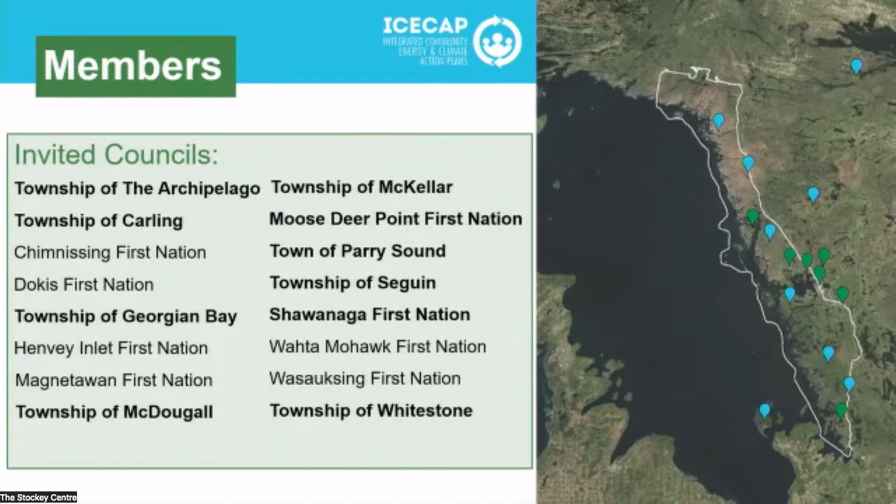As part of its commitment to ICECAP and its objectives, the town is currently working through the Partners for Climate Protection program, overseen by the Federation of Canadian Municipalities and the International Council for Local Environmental Initiatives. Across Canada, over 400 municipalities have joined and are working on this program, so there's plenty of resources and case studies to help guide participants, further improving the cost effectiveness of taking on this work.

The Partners for Climate Protection program operates on a 5-milestone framework. This starts by conducting a baseline inventory of emissions and projecting them into the future. From there, an emissions reduction target is set, and an action plan is developed to serve as a roadmap for how that target is going to be reached. That plan is then implemented, and its progress is monitored along the way.

With respect to milestone 2 and establishing that emissions reduction target, it's worth noting that the town, as well as other ICECAP members, are carrying out this work with what's called a bottom-up approach. This means undertaking an in-depth review of the opportunities, technologies, constraints, and asset replacement schedules to better understand what level of emissions reductions is actually feasible to achieve.

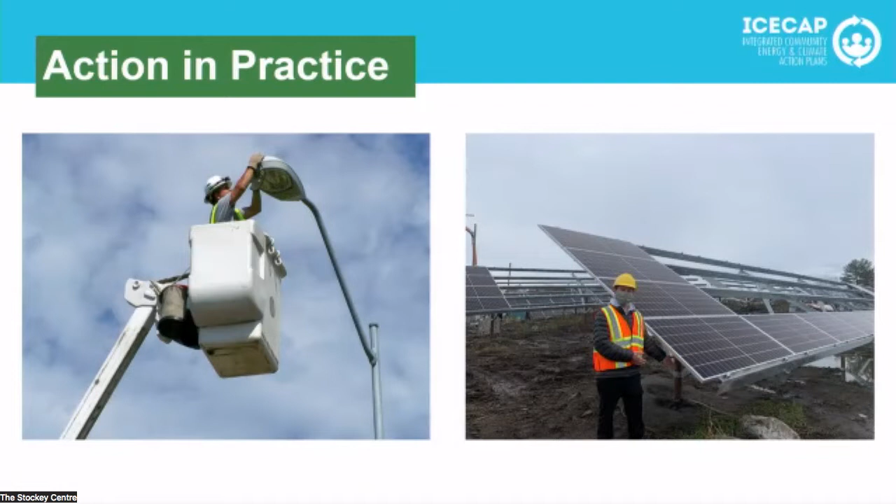The 3D milling project, which we've been gathered here to discuss today, is another such project that aligns with the town's climate action commitments and also supports ICECAP's objectives within the region.

As a climate action practitioner, what I find truly interesting about this project is that it's an excellent example of the town's ability and leadership to reduce their Scope 3 emissions. This is an exceptional undertaking because Scope 3 emissions, for the town as well as other local governments, are notoriously difficult for any organization to address.

Despite this difficulty, by being accountable and moving forward with its climate action commitments, the town's efforts to source and look for these innovative opportunities and solutions result in projects that are expected to see cost savings and emission savings compared to a more traditional program. This is a perfect example of what ICECAP seeks to achieve, and of the alignment between commitment, planning, and action in the climate change world—looking for ways to address climate change while developing our communities in a more sustainable way at the same time.

Importantly, I also want to recognize that the town's efforts here have regional benefits as well. Through the knowledge sharing platform and discussion that happens at the ICECAP table, other ICECAP members will have the opportunity to learn about this technology, its benefits, and the town's experiences with it. In turn, this will support those members in achieving the same sort of benefits when undertaking similar projects.

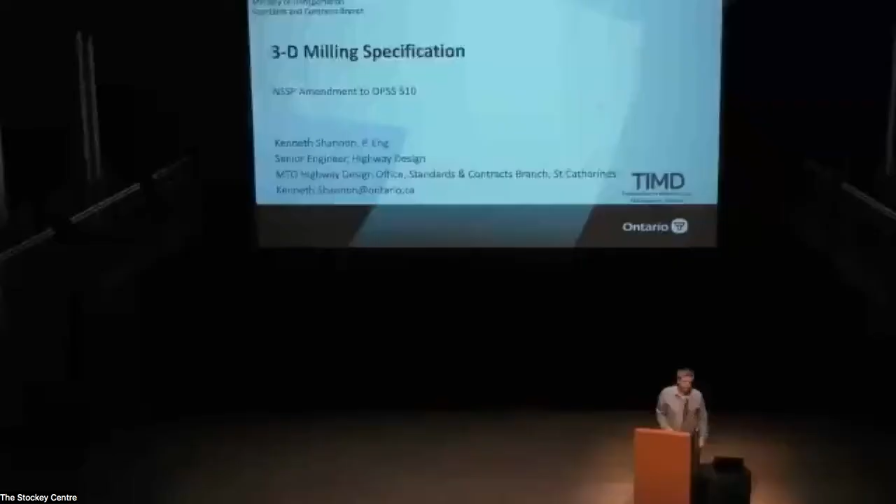Good afternoon, everyone. My name is Kenneth Shannon. I'm a senior engineer in the Highway Design Office at MTO in St. Catharines. I want to start off by thanking the Town of Parry Sound and Mike for the invitation to present here. I'll be giving a brief presentation on a non-standard special provision amendment to OPSS 510, our removal specification, which covers 3D milling. I personally wasn't directly involved in the development—my office just kind of got it to the finish line. My office deals primarily with geometric design, roadside safety, and active transportation, that kind of thing.

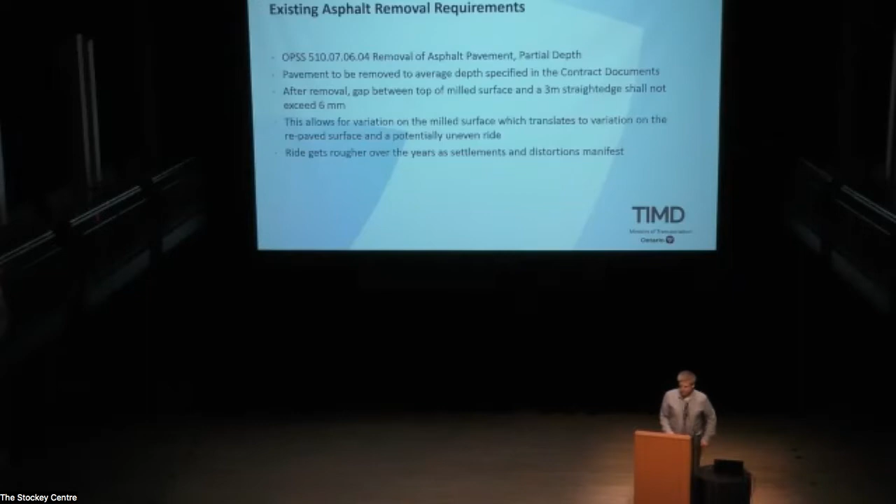Not to discount—obviously there's certainly a geometric component to 3D milling, but there's also geomatics as well as geotechnical, which were all heavily involved. So the existing asphalt removal requirements are covered in OPSS 510 for removal of asphalt pavement, partial depth. Currently, the pavement is removed to the average depth specified in the contract documents. The way of doing on-site quality control is to hold a 3-meter straight edge, and the maximum gap between the bottom of that straight edge and the milled surface shouldn't exceed 6 millimeters.

So what this means is any variation or distortion on the existing highway is likely going to translate into the milled surface, and thus onto the repaved surface. That'll lead to potentially uneven ride, and distortions get rougher over the years as they tend to intensify with vehicle loading. So again, it's served us well for many years—it generally works, but to mirror Mike's comments, there's always room for improvement. That was the goal we're chasing with this special provision.

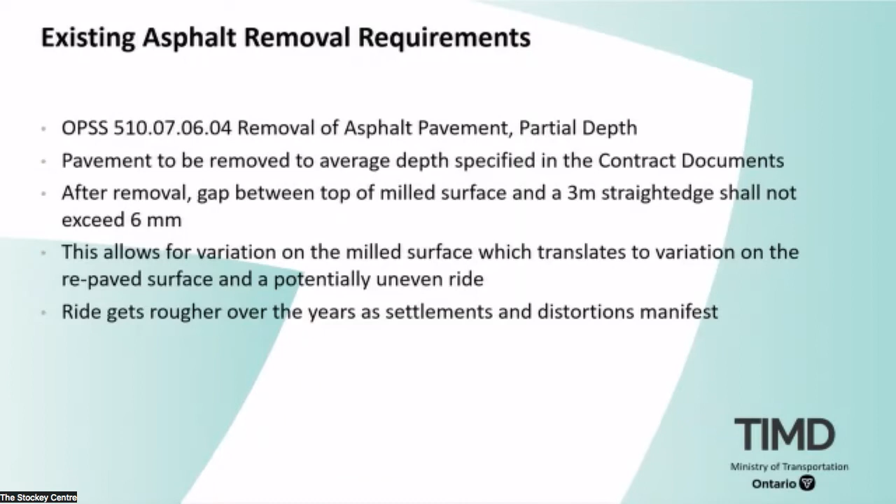So emerging technology—again, the ministry's been aware of this for a number of years. There's automatic machine guidance that allows for removal of pavement to a much higher degree of precision compared to the average depth method that we currently specify in our removal spec. As I'll take you through, the equipment can mill to a predetermined or pre-designed 3D surface, which is input into its computer. So we've developed this NSSP as an amendment to OPSS 510 that allows for this.

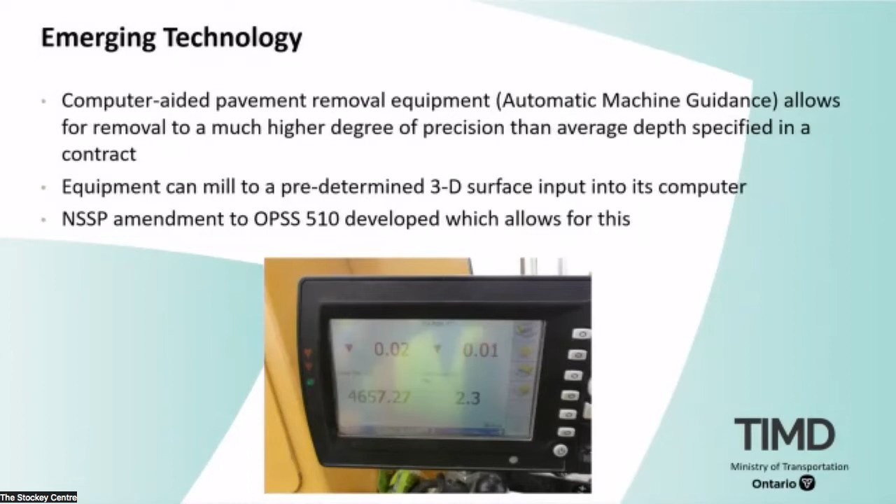So the benefits of 3D milling: it minimizes waste and inefficiency in milling and paving operations. There's obviously the greenhouse gas component, which wasn't the primary driver behind this, but it's certainly a part of it. Our office has a climate change engineer who looks at ways the ministry can reduce its carbon footprint. It reduces the chance of any existing distortions reflecting through into a rehab pavement surface, and ensures consistent, high quality in achieving specified cross slopes, super elevations, and transitions. It also provides an overall superior as-built product, which hopefully would require fewer repairs between rehab cycles—patching, strip repairs, selected localized repaving, and things like that our maintenance forces have to do.

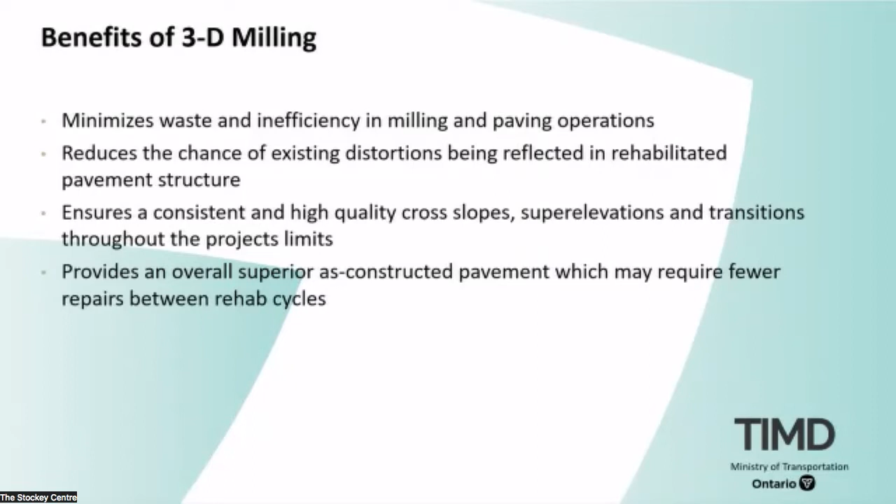From the feedback I've received in the field, there's 2 projects where it's been used as a trial this year, and the accuracy of the initial LiDAR survey is really the key to success. That's what they're finding in the field.

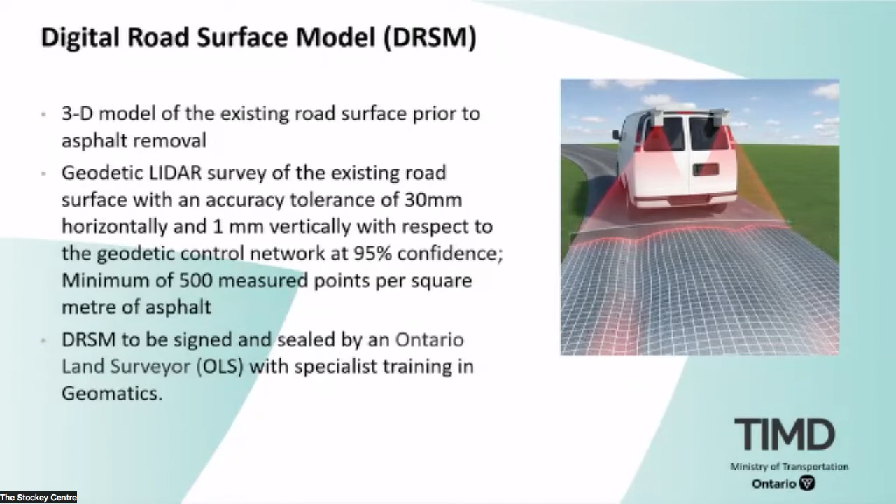They measure out a minimum of 500 measured points per square meter of asphalt. So over kilometers and kilometers of road, multiplied by however many lanes there are, that's quite a bit of data to be processed. The digital road surface model needs to be signed and sealed by an OLS with a specialist in geomatics.

So from the DRSM, we convert that into a digital design model. This is a 3D model of the proposed milled asphalt surface. And again, the DDM can be optimized.

Based on a number of constraints, I won't go through all of them, but a couple of things to highlight: it can allow for a smooth longitudinal transition where required - 400 to 1 for freeways, 200 to 1 for roads with lower design speeds and lower traffic volumes - as well as provide an opportunity to match into existing constraints, so curbs, catch basins, maintenance holes, that kind of thing.

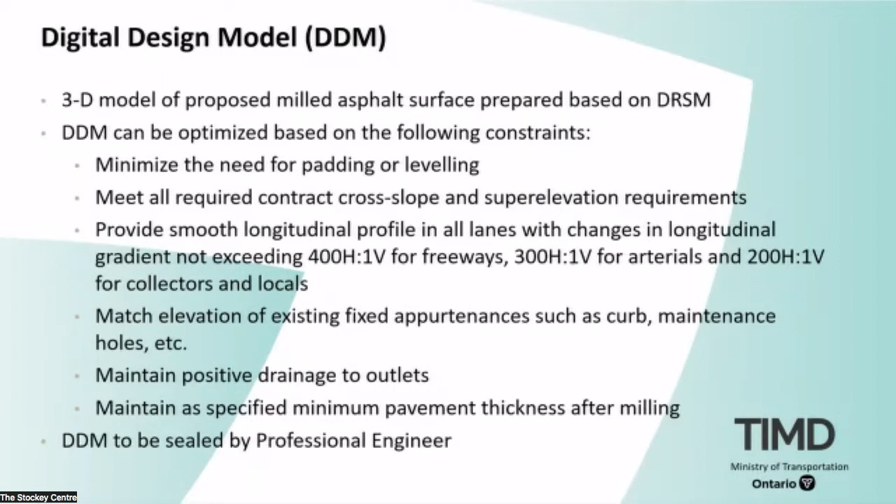And the digital design model is required to be signed and sealed by a professional engineer.

So from that, the automatic machine guidance system is required on a milling machine when this NSSP is used in a contract. The digital road surface model and the digital design model are used to create what we call a digital machine control file, or DMCF, which is uploaded to the automatic machine guidance system.

The DMCF guides the milling machine, milling goes out, and the special provision sets out a plus or minus 5 millimeter tolerance. Think about the coarse aggregate used in the surface course of a typical road - typically a 1/2 inch - so that's half the size of a piece of coarse aggregate. That's quite the tight tolerance, and that speaks to the level of precision that these systems can mill to.

There's a requirement in the NSSP that an OLS goes out with a total station to verify that the 5 millimeter tolerance has been met. Based on what's been milled, there's a cross slope tolerance of plus or minus 0.15% as well.

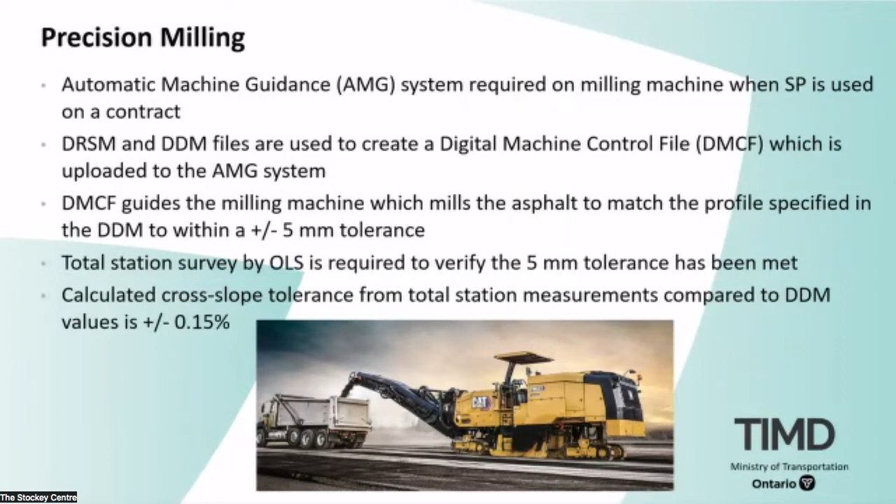So the industry consultation - we posted the draft NSSPs. There's 2 of them, which I'll touch on in the next slide. They were posted on the technical consultation portal site that the MTO maintains for a 21-day consultation period for the public to review and provide comments.

That was done in October 2021. We received 4 sets of comments from industry. They were mainly seeking clarification with respect to survey requirements. Our geomatics office worked to resolve those and improve the spec accordingly.

From there, we provided a formal response, which was posted on the technical consultation portal after making the revisions. And this is a good opportunity for me to give a shout out to that technical consultation portal.

In case most of you may not be aware, we decided to streamline and consolidate our technical consultation for any new specifications, drawings, policy, that kind of thing. It was actually in response to an Auditor General's finding and recommendation that we weren't being as open and transparent as we should have been.

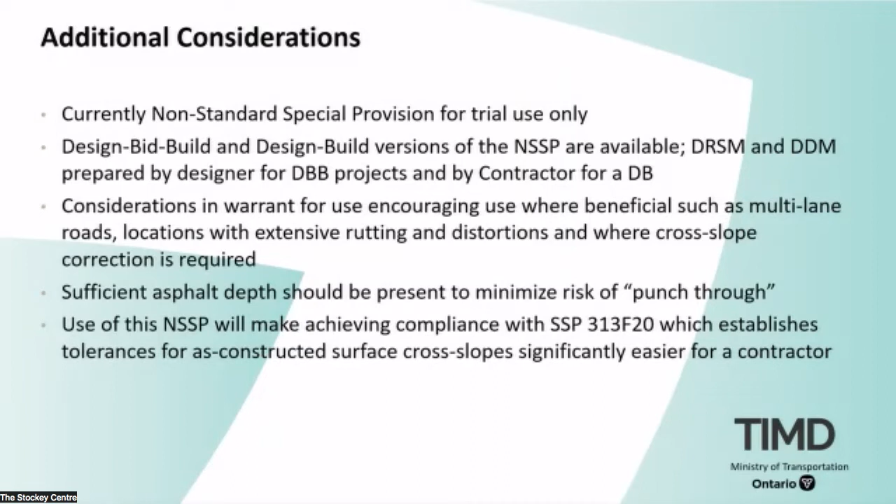I think I probably should have done it at the start, but I'd like to also say thanks to Eva from the Consulate General's Office with the Czech Republic. I'm not sure I see Eva - can't see anything. Oh, right there. So in helping us arrange this - Exact Control System is based originally in the Czech Republic, and I think the LiDAR scan, when we did it, came out of Timmins. They were doing some work in the mines up there, which caught my attention. I came back to Parry Sound from up north in my working career.

Probably should have printed that out, make it a lot easier, right? So, Rotomill is our next speaker. Ted's not here, but Rotomill can speak to the experience. I think they're the folks that have been doing the milling portion of these projects. I'll be short.

As far as the MTO spec, we're happy to see it coming out. We were a bit ahead of the curve, and perhaps that bought us some latitude in learning how to do this from a municipal perspective. But so far, it's been a really good experience, and I anticipate good things coming out of this. So no further ado.

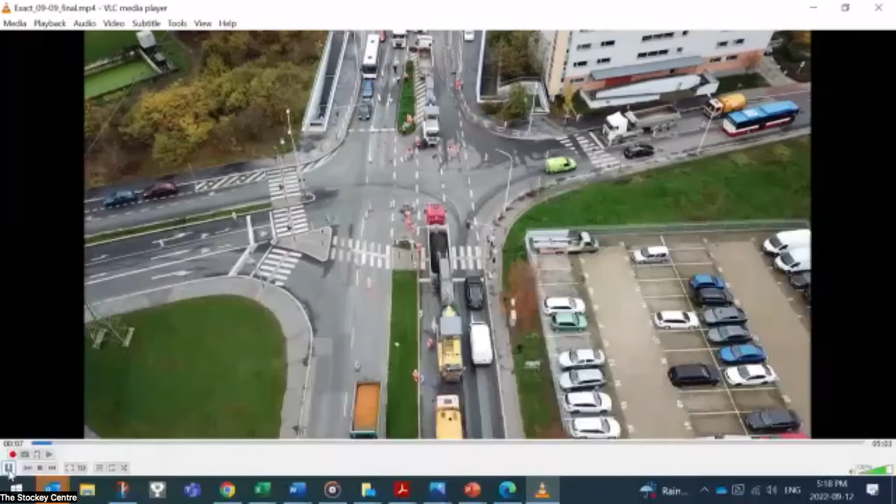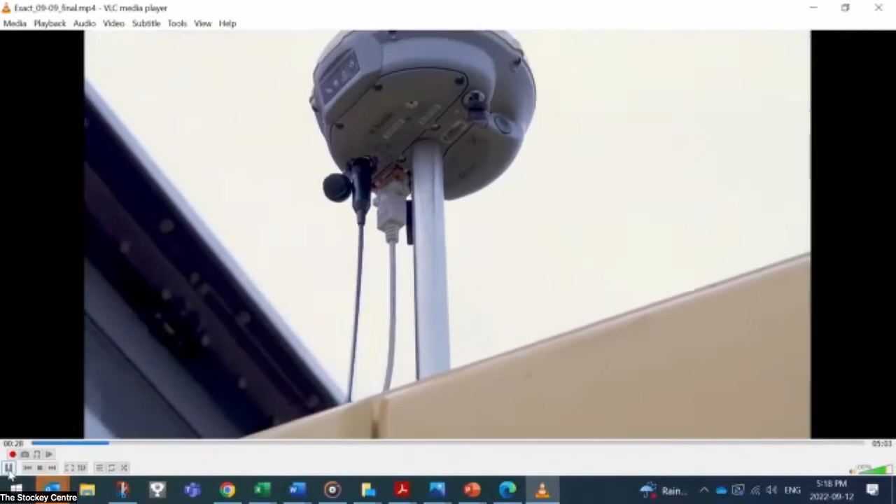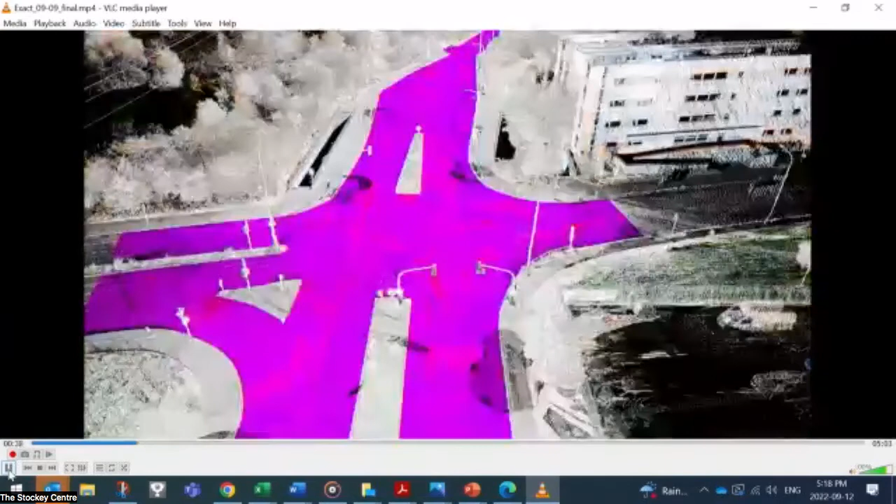We are located at Brumarska Road, where the resurfacing is currently taking place. The milling is underway using our 3D technology called Exact Street, which is based on a precise digital 3D model. There are two GPS devices placed on top, and that allows us to measure the exact position. We have uploaded a differential digital model of milling into this tablet. All of the data from our tablet goes straight into the milling machine, and it is then controlled automatically.

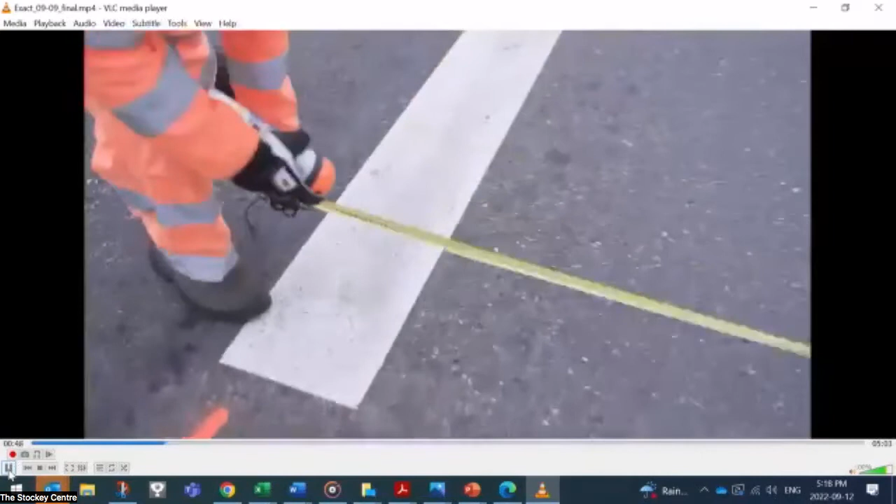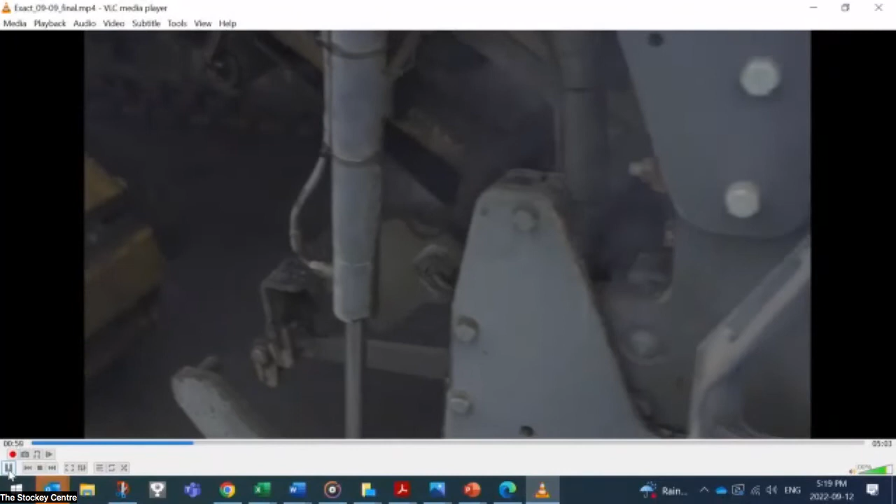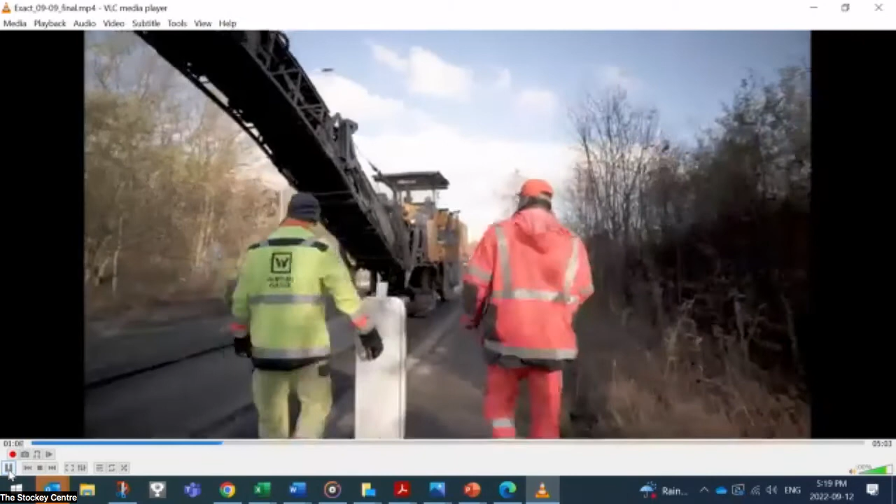Without our 3D model, the milling machine operator can only set up the constant milling depth based on the project specifications. There's absolutely no way of predicting road imperfections, so the milling machine can only improve the longitudinal ride by averaging out the existing grade irregularities, therefore removing asphalt pavement in areas that are not actually required to be removed. The Exact Street technology allows us to set an optimal milling depth position of the machine in all locations of milling at all times.

Here is a perfect example where we can clearly demonstrate the difference in our milling process from 4 centimeters to 7 centimeters.

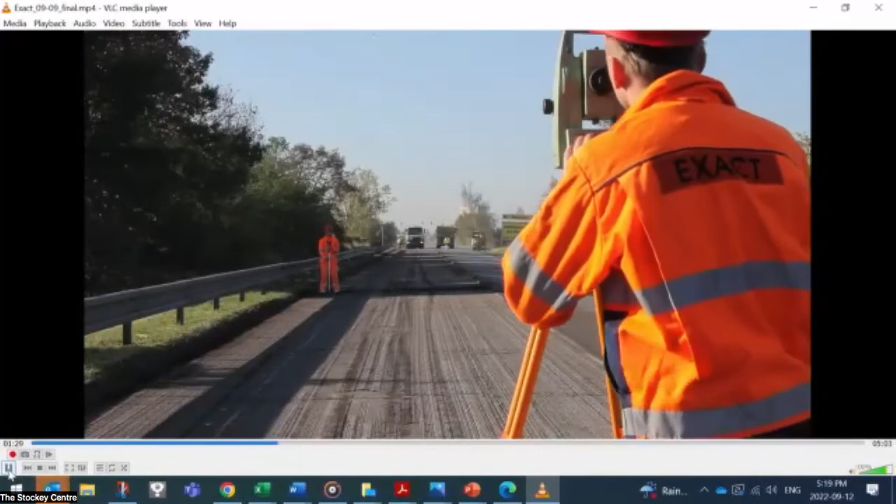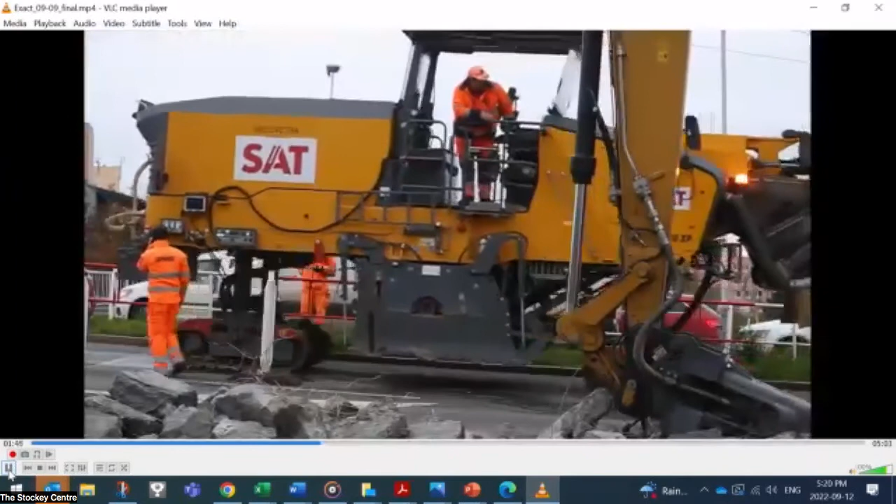3D milling using total stations requires a direct visual connection between the total station and the milling machine, which is usually very problematic due to elements such as traffic, other construction machines, or vegetation. Complications are also caused by vibrations from wind or construction machines themselves. One of the biggest advantages of Exact Street technology is that it doesn't require any total stations or surveyors to guide the milling machine. A GPS receiver and a tablet with a digital grade sheet on the milling machine is all we need.

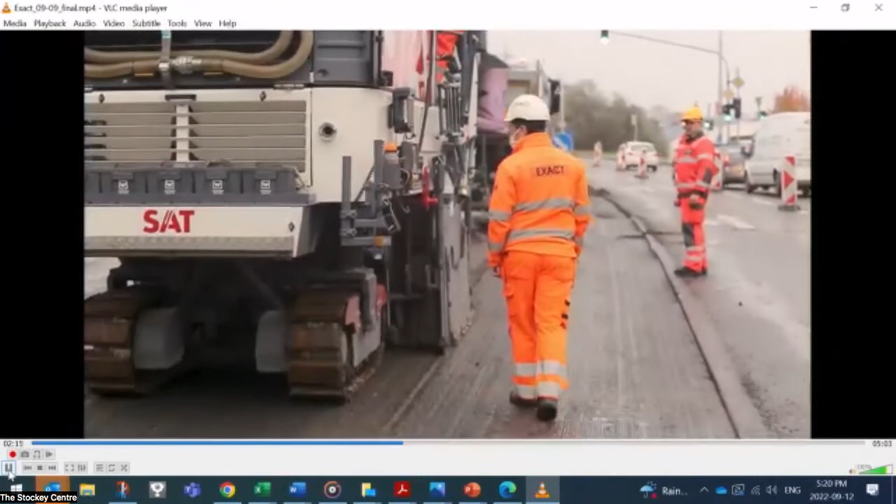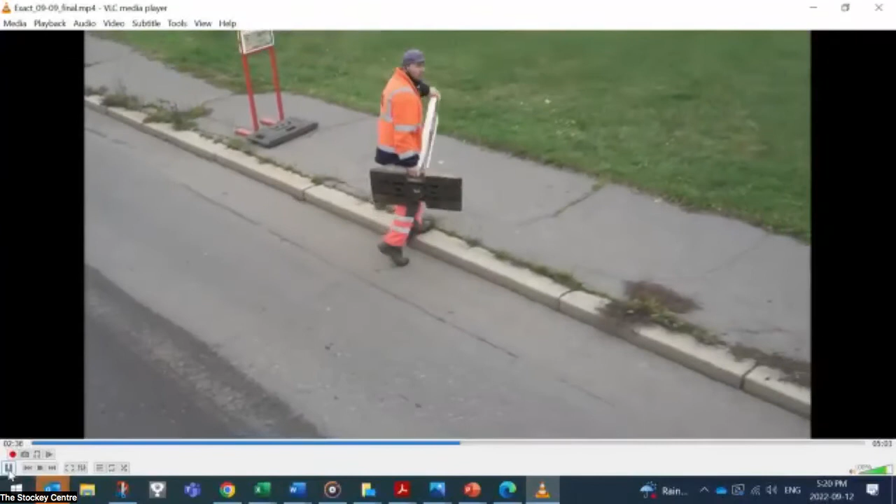The main advantages and benefits of Exact Street differential milling offer immense flexibility in planning out the project and focusing on details of the working area. The direction of milling can often be affected by traffic, but with our technology, we're able to start and restart from anywhere without any delay.

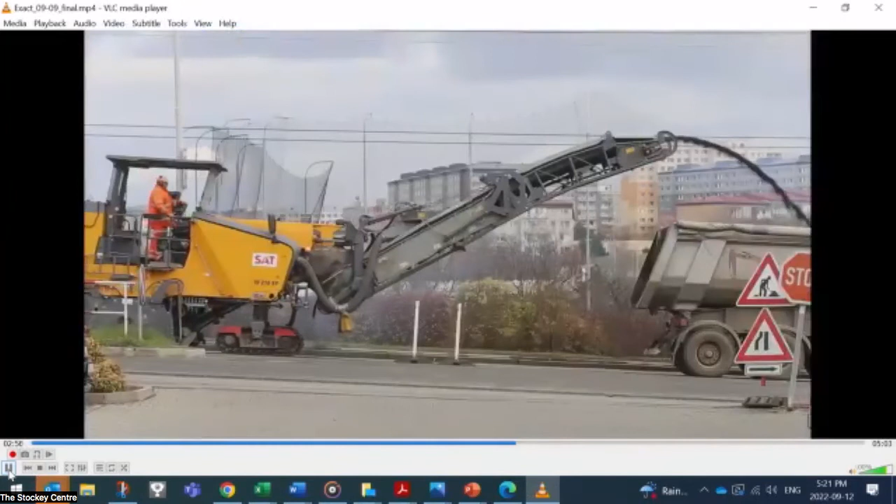Exact Street 3D differential milling technology is definitely a step forward, and it will facilitate the work of everyone, including construction managers, technicians, workers, and machine operators. The definition of future is simply based on quality and improvement. We have definitely accelerated in all of those spectrums.

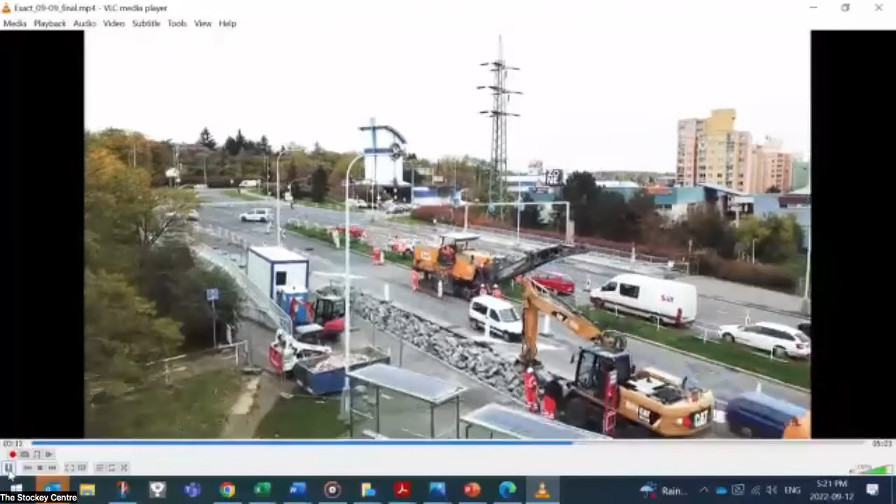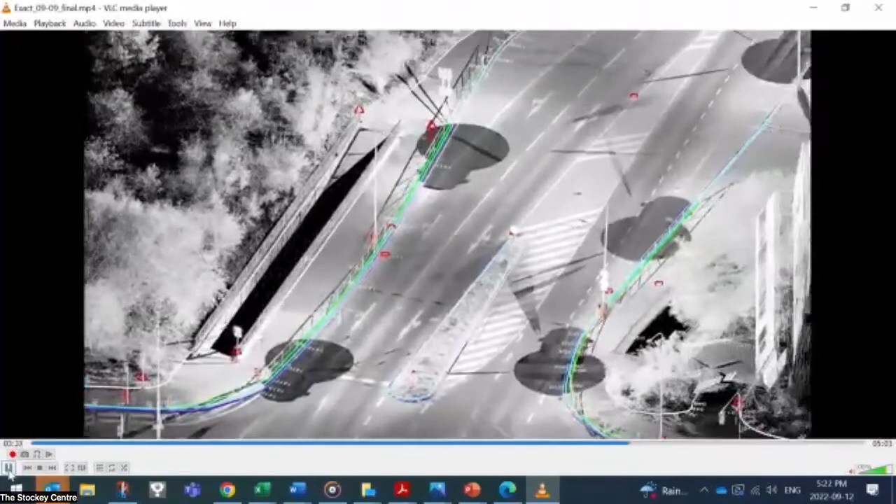If we can incorporate the Exact Street 3D technology into the milling process during initial project preparation, we can keep the cost of the project as low as an estimate, even without this technology. The cost will only be altered by the use of precise survey, which can be used in the future for archiving purposes. We will store accurate information about the entire communication, as well as the location of street drains and other utilities. We can collect these materials for all services where 3D technology for the milling process will be used.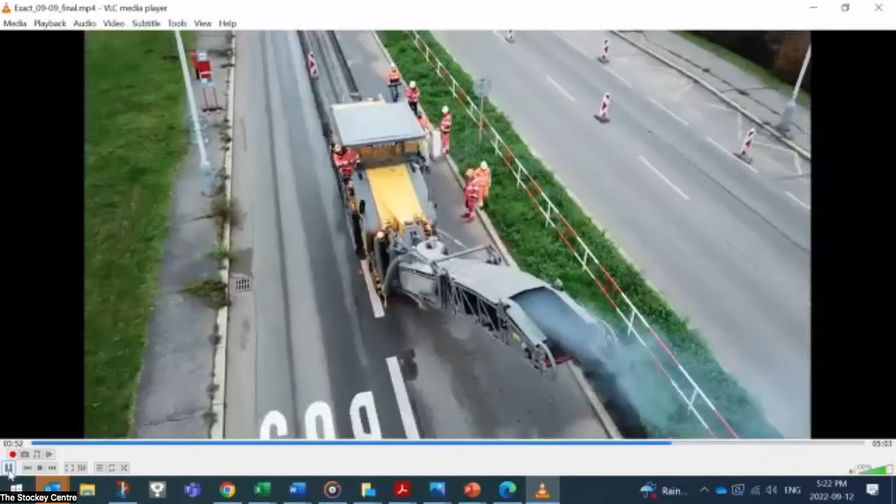We can accurately verify whether the quantity of materials used for the project is equivalent to the materials planned, and furthermore assess all layers that need to be laid, and thus control and sustain the quality in the future.

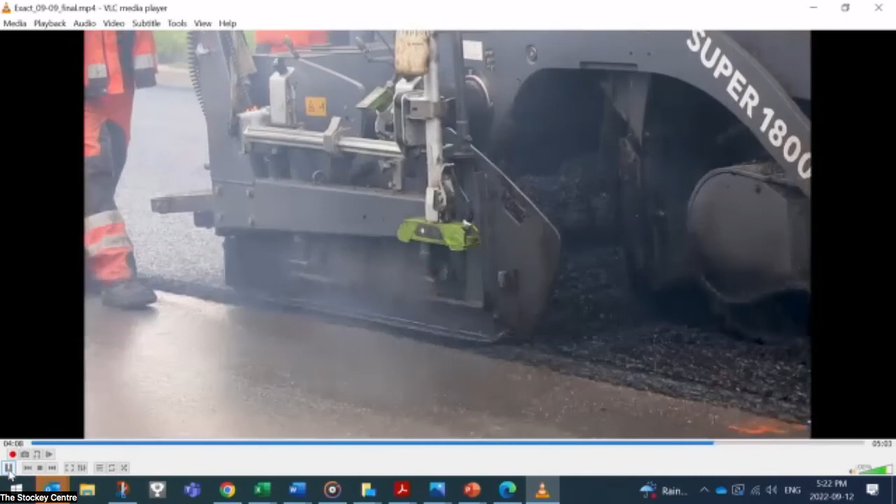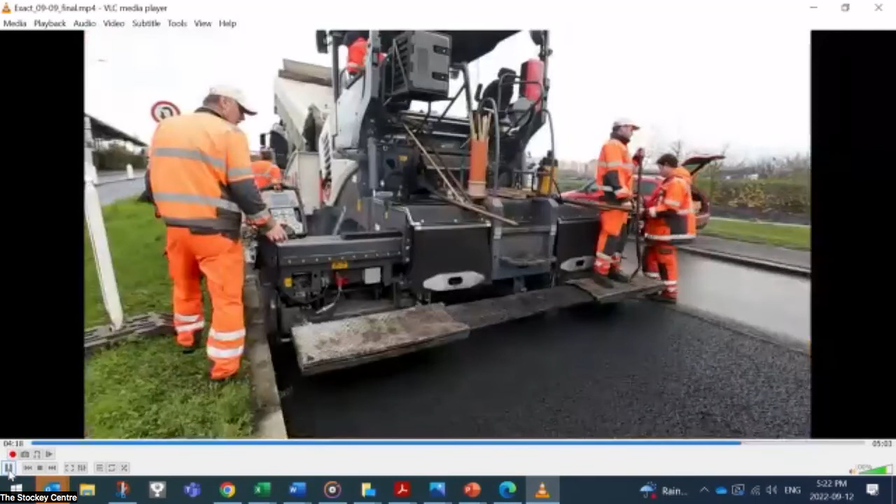The government aspect of our business is obviously very important to us as well. Our technology does not only shorten the closing time of road reconstruction, but also assures the quality that greatly impacts the environment and well-being of our citizens, thanks to the accurate measurements of the contractor, whose contribution will surely and significantly affect the quality and endurance of the final product, which is a perfectly resurfaced road.

From an informatics and robotics perspective, the only future approach to efficient repairs is to create information images of real roads and use them specifically for road repairs and maintenance, thereby achieving economic savings. The trend is definitely to save as much as possible, but the question is where to save. Here, higher project preparation costs subsequently reduce maintenance costs and extend the lifetime of roads.